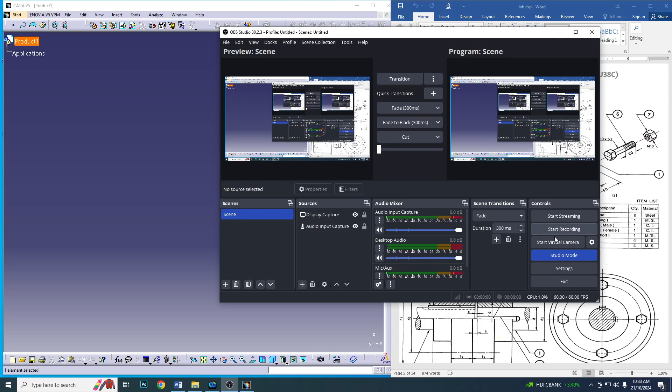Good morning all. Today we are going to see how to do a 3D assembly of the protected type flange coupling. In this coupling we have got the item list or the bill of materials here.

We have got shaft end in two numbers, and we have got a flange male. The part number 3 is the flange male. Here you can see the projection, so this makes it the male part of this coupling.

That is the flange male, and we have got the shaft associated with the flange male here. For the time being, I'm going to call this the male shaft. And then we have got a key, which is a long key, used to assemble or make an interference fit between the flange male part and the shaft male part.

Now next we have the flange female part here. Here you have got a hole, and this makes this the flange female part. And we have got the shaft here, which I'll for the time being call the shaft female, and this is being fixed using a key short, and the dimensions are all given here.

And then we need four nuts and bolts. So we have got M10 by 52 bolt, and in order to complete it we have got M10 nuts, and we need this pair in four numbers in order to give the connection between the flange male and the flange female through the holes provided here.

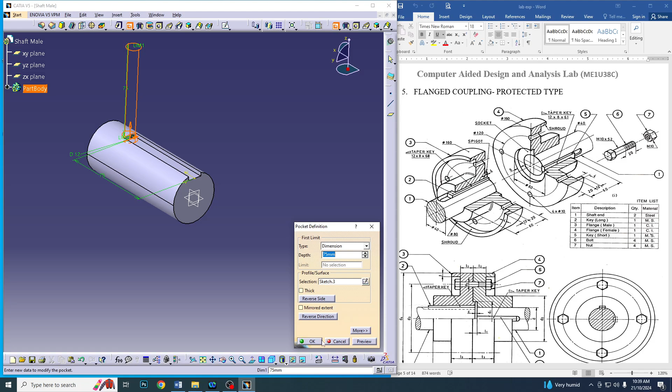Or we'll select this plane to do the cut at that particular angle. So I'm going to draw a circle of diameter 12 millimeter, the center exactly here, and this distance I'm going to give as the length, that is 75 millimeter, and I'm going to pocket it upwards to get that. So this, we have got the shaft male here.

So I'm going to save this as save as, in volume G, I'm going to create a new folder, naming it flanged coupling protected, and I'm saving this shaft male here.

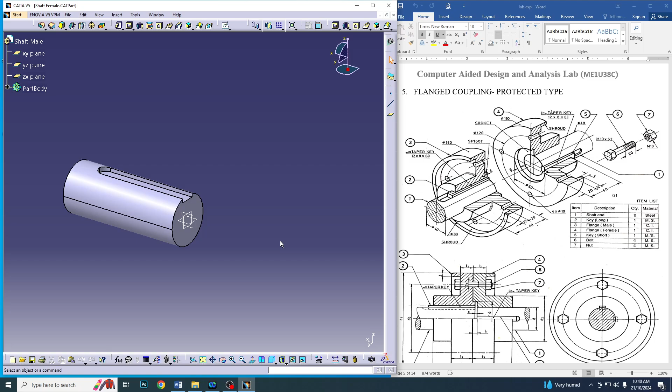Again, for the female, we have got the same dimensions, except for the keyhole, which is a little bit shorter here, but that doesn't matter. We can use the same shaft for the female side also. So I'm going to save it as shaft female. Now I've got two parts here, shaft male and shaft female.

Now the third one, I need to create this flange male. So in order to create this flange male, I'll start again a part drawing, flange male. Now I need to create it, either by drawing the cross section and doing it, or I can draw it using circles.

So I'm going to select this sketch here, and the outer diameter of the circle is 160, going from here to here. So first I'm going to draw this with a diameter of 160. So here I've got the circle, specifying the diameter as 160, and I'm going to pad it for a distance of 20 millimeter. Now I'm going to select this face for sketching.

Here I'm drawing two concentric circles. The first one being the outer diameter, that is 160, and the second one is this small circle. The thickness is 4, so this should be 160 minus 4 minus 4, that is 152. And I'm exiting the workbench, and when I'm padding this, I'll get this particular shroud here. The shroud I'm getting, I need to pad it for a length of 12 millimeter. So the dimension is 12. So I've got this shroud also.

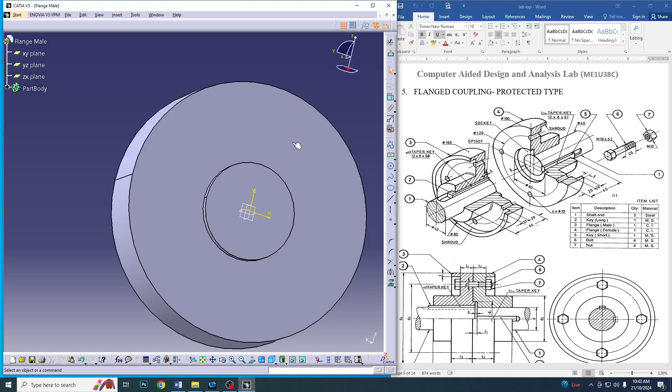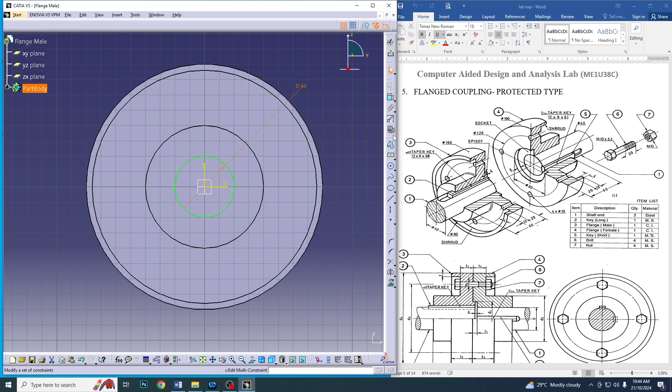Now I need to create the hole, so I can select this plane, or what I'll do is I'll select this face and give sketch. Now I need to create the hole here. This hole, which goes entirely backward, has a diameter of 40 millimeter. So that 40 millimeter hole I can give, and using the same plane I can create these 4 holes also. So that I'm going to create right now.

The diameter is given as, since this is M10, the diameter should be 10, and it is positioned at a distance of 60 millimeter, specified by the circle here with diameter 120. And I need to create another circle, again the same dimensions, diameter 10, and the length is 60, and I can mirror this circle with respect to horizontal to get this one, and I can mirror this circle with respect to the vertical to get this one.

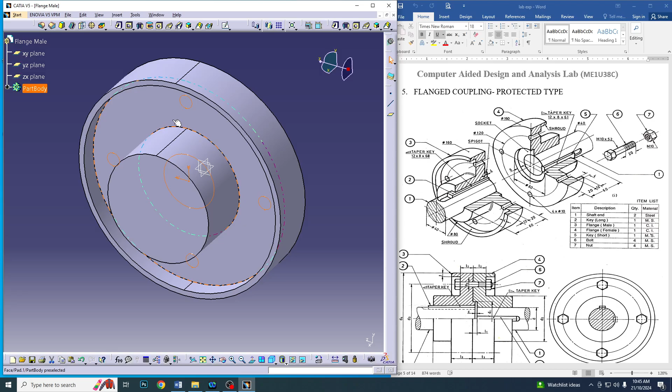Now keep in mind that we have used this surface for sketching, so I need to pocket it. When pocketing, I'll give mirrored extent, and I'll give up to last. I'll give dimension and give mirrored extend, and give a dimension which is very higher than the entire dimension. So the 60 is here.

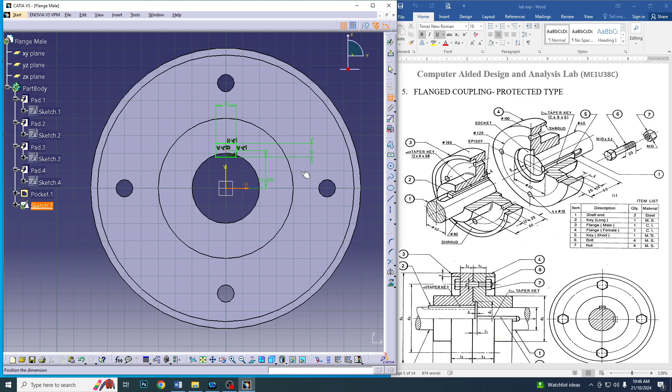So here we have got our flange male, and the things that we need to add now are this keyhole as well as this filleting. So first I'll select this face to create a keyhole. The same method we used for defining the key in the shaft, we will be doing here also. That is, the height will be 8, and the width will be 12, and this point should be at a distance of 20 millimeter to the circumference of the circle. Exiting the workbench, and I can pocket it up to last.

So now I've got my flange male here, and again filleting needs to be done here. So I'll be selecting this edge here and give a fillet. A radius of 5 or 6 mm will do. So here we have got the flange male part here. So I'm going to save as flange male, and the dimensions and most of the geometry are the same for the flange female also, except for this particular hole here. So I'm going to use this figure and edit it in order to create flange female.

So the only difference is that this protrusion is not here, so this 4 mm projection is not here. Instead, there is a hole of similar dimension to a depth of 6 millimeter from this face.

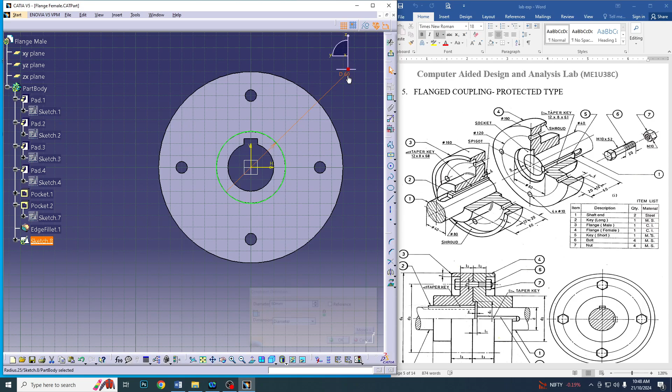So I'm going to select this sketch here, and I'm going to draw a circle to create that hole. The dimension of that hole is diameter 60 millimeter, and I'll create a hole of 60 millimeter over a distance of 6 millimeter from this face.

So here the sketch I have selected is 4 millimeter away from this face, so a total pocket of 10 millimeter needs to be provided.

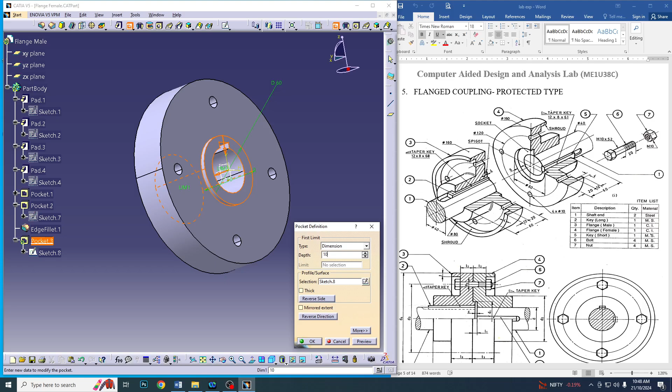And here I have got my shaft or flange female, so I'm going to save it. Flange male and female part have been created. The shafts are created, and now need to create the keys.

So in order to create the keys, again I'll go for mechanical design, part design, and I'll do key long.

Since this is a tapered key, usually the taper angle will be taken on the scale of 1 is to 100. But here, in order to make it easy, I'm going to take a scale of 1 is to 68. So every 68 millimeter, 1 millimeter will come down.

For the key, I'm considering that the dimension 12 by 8 is in the middle portion. When we move a distance of 34 millimeter towards the left, and our scale is 1 is to 68, so 34 millimeter means 0.5 change will come.

So towards the left, a 0.5 decrease will be there in 8 millimeter, that is this height will be 7.5, and towards the right, when we move 34 millimeter, 0.5 millimeter height will come, so here it will be 8.5. That is how we are going to create a key.

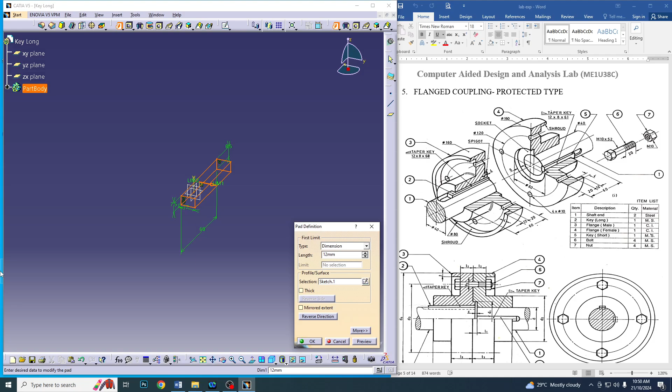So now we have got the taper side as well as the small side here. In order to easily identify, I'm selecting both these faces, and I'm going to the properties where I'm going to change the color so that it's easy for me to identify which face is the taper face and which is the short face when I go for assembly.

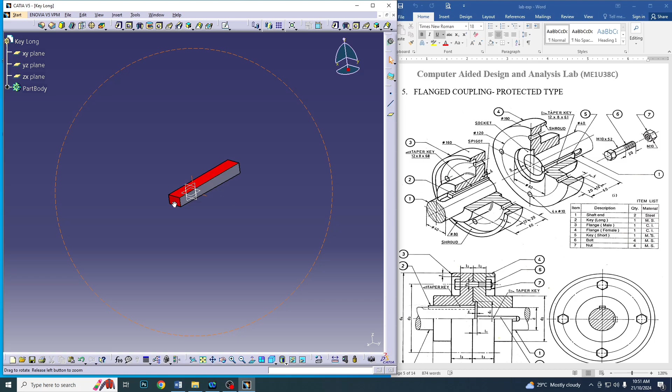So I'm going to save it. So this is key long, and again the same thing, I can edit to create key short.

So I'm going to give the name, change the name to key short here, and I'm going to edit it. I'll go back to the same sketch where I've specified the length. Here the length I'm going to give it as 63.

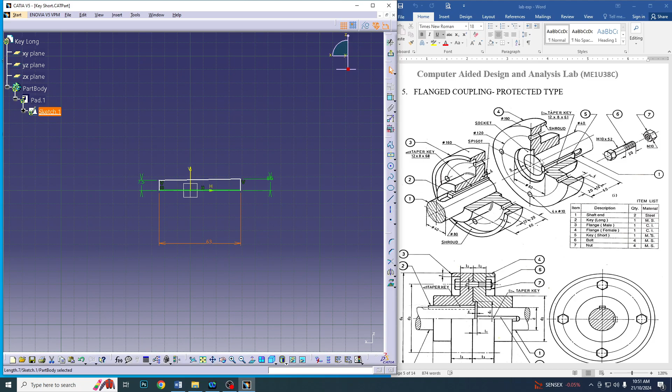So what is the scale that I've considered here? I've considered the scale of 1 is to 63 here. The length is 63, I'm going to change it. Exit workbench, so all the changes are being done here. So key short is also done.

So we have got the entire files ready. Now we need to do the assembly.

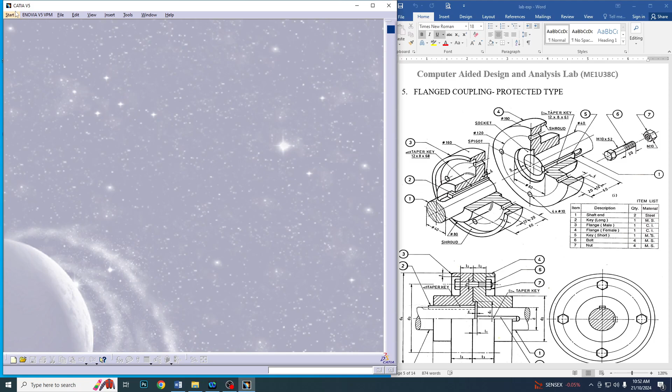The nuts and the bolts, there is no need for us to create it because it is already there in our catalog browser, so that will call from the catalog browser. I'll start mechanical design, assembly design.

So this is the place where I do the assembly. First I'll call the flange male here. In order to call it, click this one existing component, and where I would like to call it, I would like to call it on the product. So I click on the product.

And now we have got the flange coupling protected. So here we're first going to create flange or call flange male. I've got the flange male here, and when we call the first part, the first thing we need to do is fix this part. So I'm going to fix this part here. If you see the constraint, a fix constraint is being defined, and it is being specified by this particular symbol.

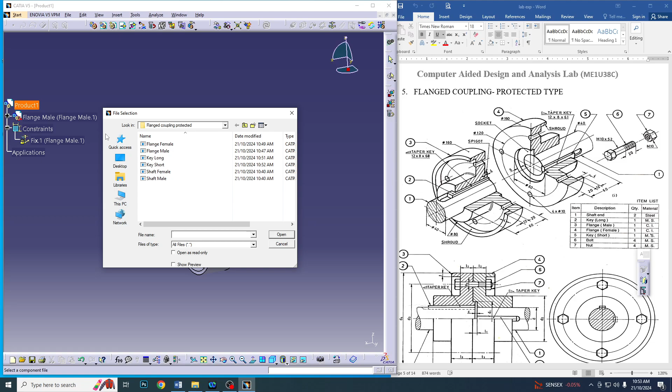And now I need to call the second part again on the product. So I click on the product and I call the shaft male here. So the shaft male is here. I'm going to move it a little bit outside so that I can really give the constraints.

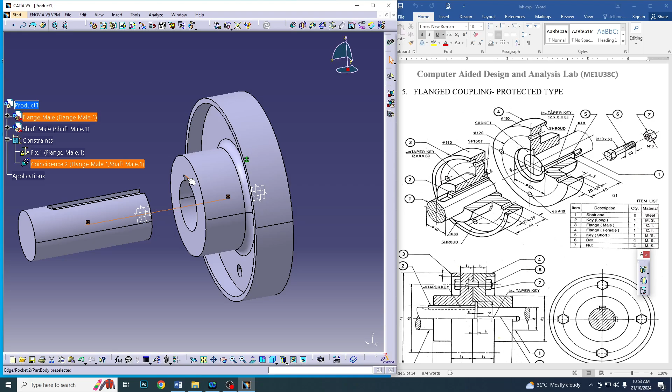So I use the coincident constraint, select this axis to make it coincident. Now this can only move along this direction. In order to align the key holes, I need to make this edge as well as this edge coincident, or on the same line. So I'm going to give this and this coincident - that is my second constraint.

And the final one is I need to make an offset constraint between this face and this face, with an offset of 0 millimeter. So once I update it, I've got the male shaft and the male flange being assembled here.

Now I need to call upon the key, so existing component, again product, and the key long is required here. So the key long is here, I'll just pull it outside for a better view. Here we have got the tapered face, and here we have got the short face. So the short face should come here.

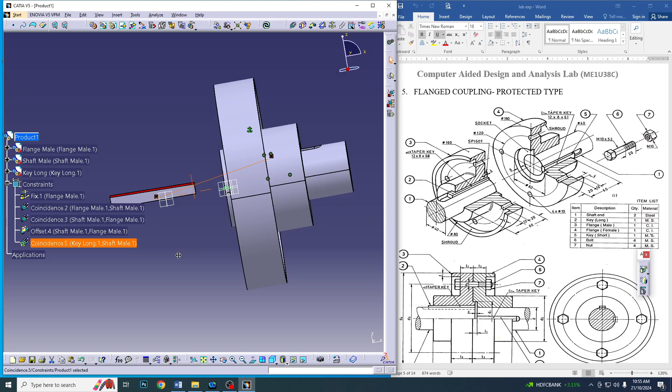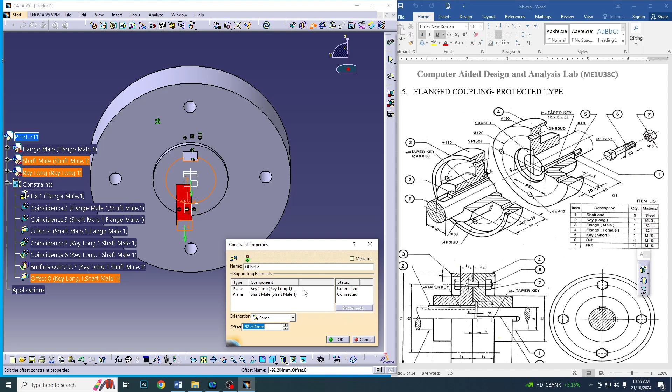I'm going to use the coincident constraint to give coincidence between edges. A tapered edge with the keyhole edges is not possible, so I'll give a coincident constraint between this edge and this edge, and a second coincident constraint between this edge and this edge. I can also give a surface contact constraint between this surface and this surface, and an offset constraint between these faces, with an offset of 0, which will perfectly fit my key into this.

So that is the male part being assembled here. Now I need to do the assembly of the female part. For the time being, if I'm calling the female part also, it will overlap, but we'll see how it can be done.

Click on the existing component, product, now flange female. Since the part numbers are the same for both flanges, even though we've changed the file names, the part number specified when opening the part drawing is the same. We need to rename it, so I'm renaming my new part as flange female. I give OK and OK.

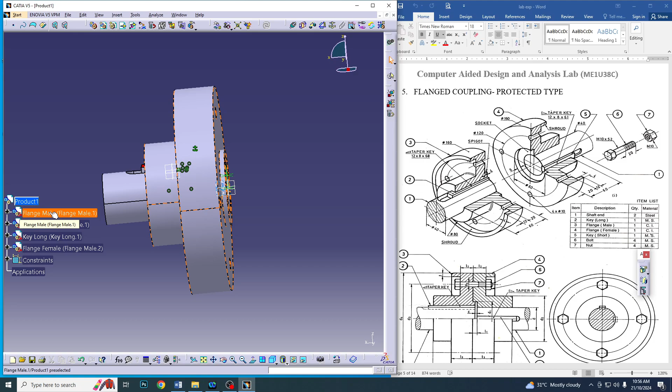So flange female is here, but it is not visible because the flange female and flange male are both on top of each other. Whenever I call this key, this shaft and so on, since we've used the same file for duplicating it, it will be one on top of the other. So for the time being, I'm going to hide the male parts.

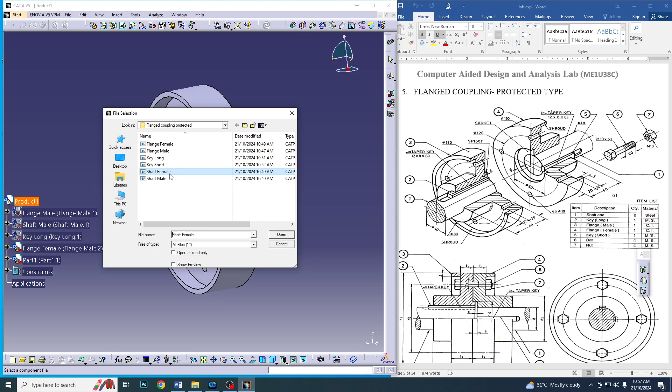Now I got the flange female here, so the female part is here. Now I'm going to call my second part, that is the shaft female. So again I need to rename it as shaft female here. So shaft female.

I'll just move it outside. Now similarly, I need to do all the constraints here the way that I've done it in the previous part. Here the inner face should be selected, that needs to be kept in mind.

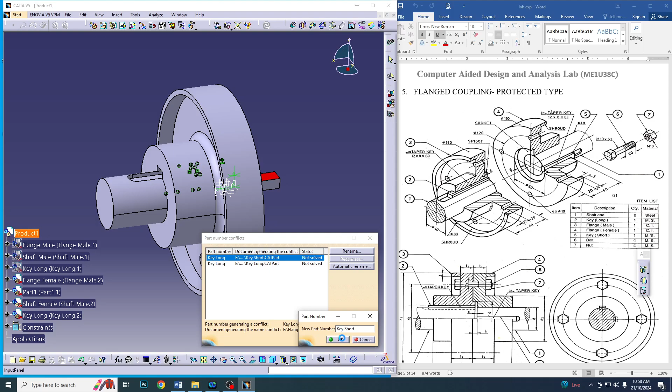And now I need to call the key, so key short. Key short is here, I'm going to move it outside. I need to give the constraints.

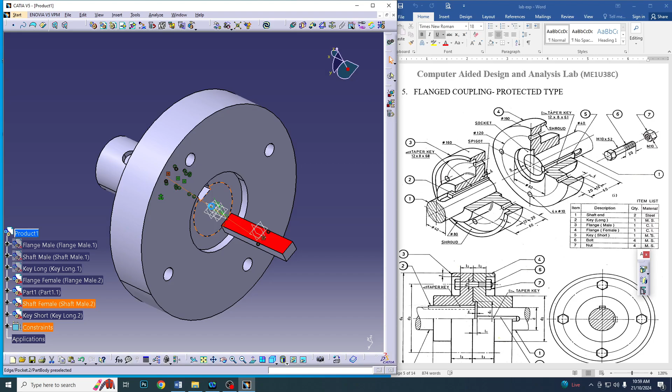So between this and this, again between this edge and this edge, and a contact constraint between this surface and this surface, and finally an offset constraint here to here with an offset of 0. It's updated - it's a perfect fit.

Now I'll just move it, and when moving it I need to rotate it so that it won't be in line with or on top of our shaft male parts when we unhide them. So I'll rotate it and displace it a little bit for ease. But if I rotate it or do any manipulation on this, the constraints will be gone. So I'll check this option with respect to constraint, then rotate it about the Z axis. I've got this rotated here, and I need to drag it along the X axis to move a little bit here. Okay, that's fine.

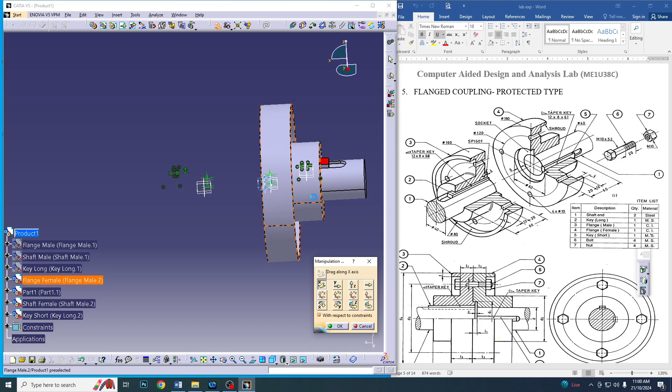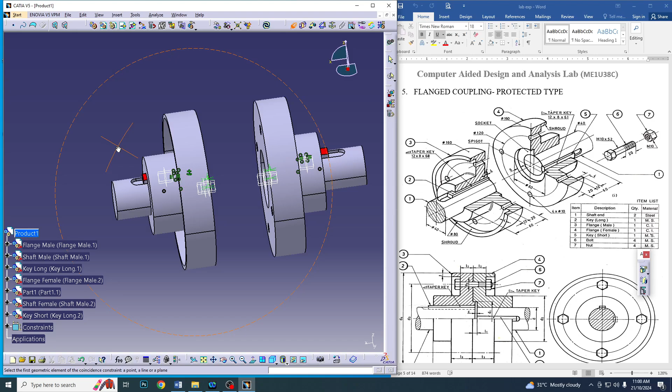And I'm going to unhide my other parts which have been hidden. So we've got the parts here, and now I'll do my final assembly where I'm going to make the constraints between the axis of the shafts. Then the second thing I need to do is coincide the holes, making the holes aligned.

Here you can see this hole corresponding to this particular key is at an angle of 90 degrees with the hole corresponding to the key here. So the keys are aligned at a 90 degree offset. What I'm going to do is give the coincident constraint between this hole and this hole.

Once I update it, you can see the keys are 90 degrees apart. Now finally I need to give the contact constraint between this face and this face, and here we have got it assembled.

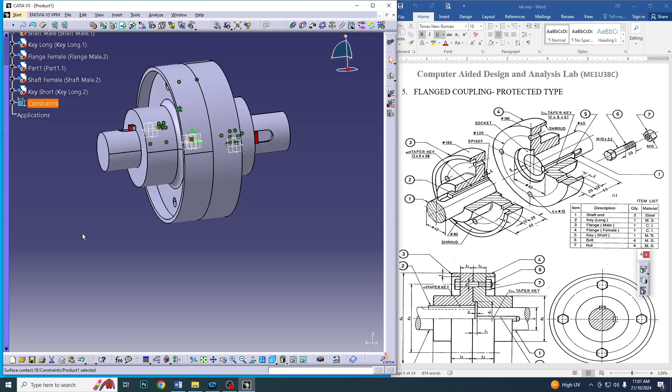Now we need to include the nuts and bolts here. I'll call the nuts and bolts from the catalog browser available here. I'll go to the catalog browser and select the ISO catalog. The ISO catalog is there. Then the bolts, the hexagon head bolt is here. I need to select M10 as specified here.

As you can see, M10 is here, and we have got M10 by 45. Here the length is M10 by 52, so we'll select 55 from here, 4 numbers. We have got 1, 2, 3, 4 bolts here, but the bolts are not visible right now.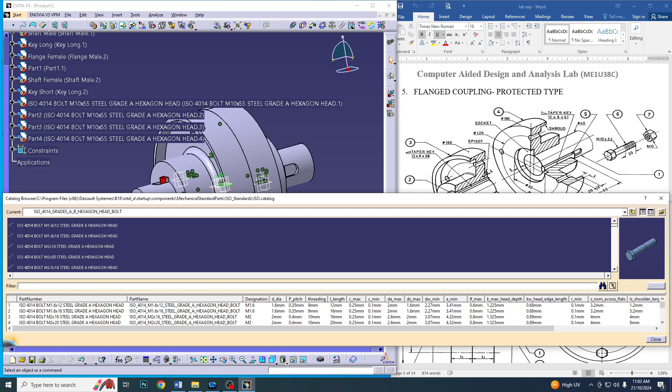So it's somewhere within this. What I'll do is hide all these things. Hide, hide, hide, hide, hide. I have hidden everything. So here I've got the bolts.

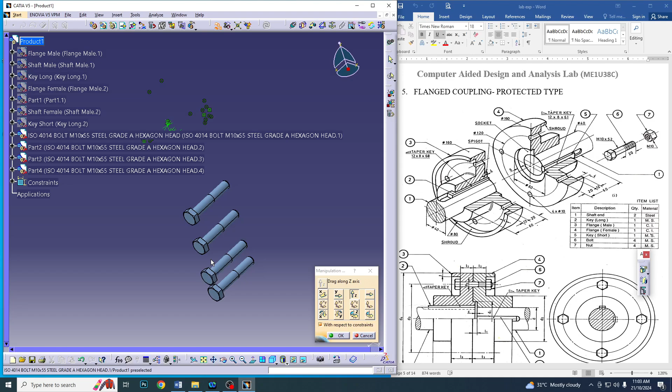So I'll do it along the Z axis. I'll just change 1, 2, 3, 4. I've got it here, all the 4 bolts here. Give OK.

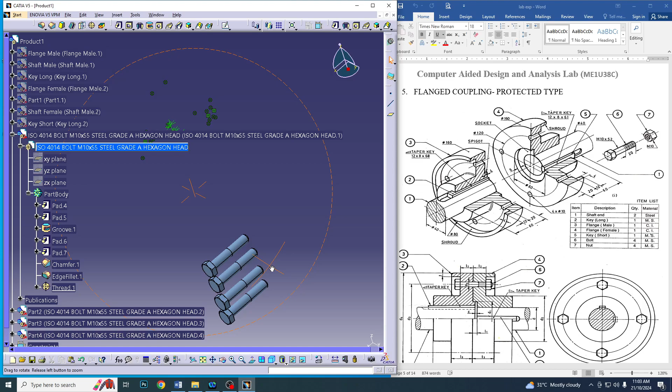And if I want, it is possible for me to edit the length to 52. I'll just show how it is done. I'll check this pad, double click on it, and try to edit the dimension. Click here, and I can make this 52. I give OK so that the change will be done. Now I'm not going to show this or repeat this everywhere. I just need you to know that this is possible.

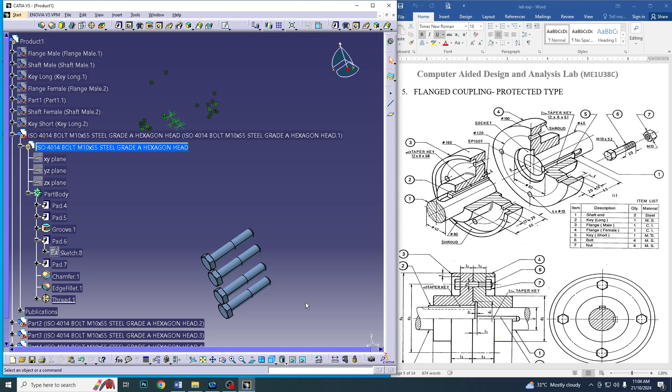But what we'll do is keep it at 55 itself. This is possible, okay. So I've got 4 bolts here. Now I'll call the nuts also.

Right now we are not in the product menu. Here when you see the pad and this option, it's a part menu. So I'll double click on the product. My catalog box is here. So I need to now call upon the nuts. I need the hexagon nut style 1 here, and that is an M10 that I require.

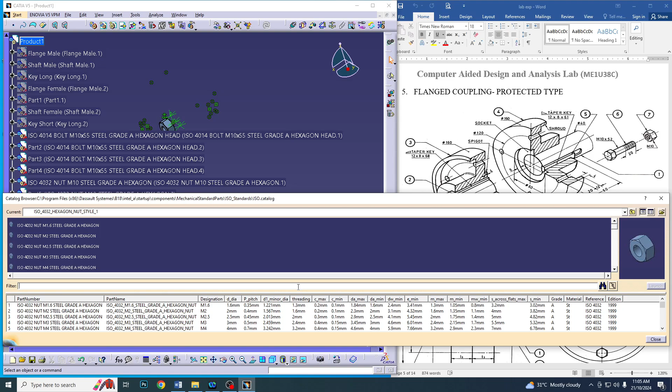So 1, 2, 3, and 4. I've got 1, 2, 3, 4 nuts here. I can move it along the Z axis. Yes. 1, 2, 3, 4. I'll do an X also. 1, 2, 3, 4.

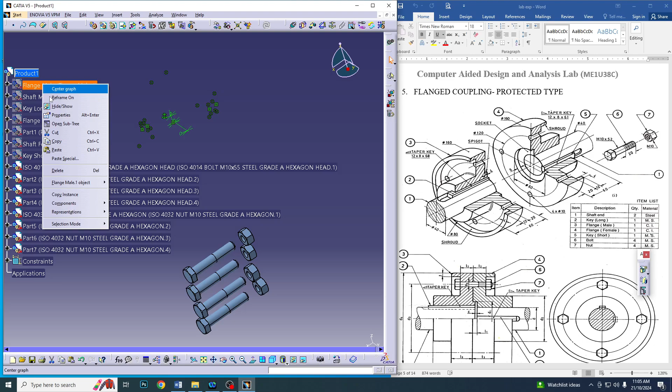Just placing it conveniently. Now I'm going to unhide the parts that were hidden and do my final assembly. Okay, I've got it here. Now I need to do my assembly.

So what I'll do is give the coincident constraint between this and the nut here first. Coincident being given here to here. This one, this one, this one, and this one. The coincident was given, and now I'll coincide it with my 4 holes here.

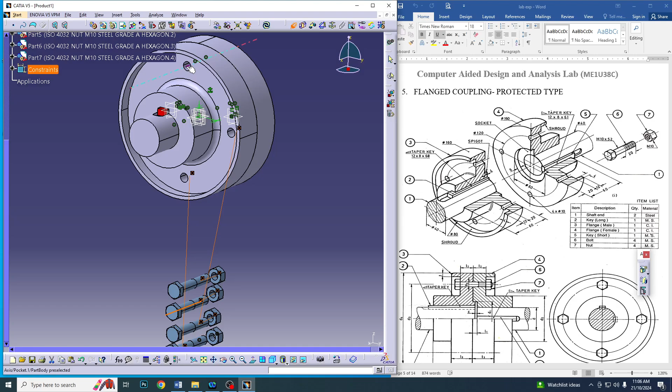First here to here, this to this, to this, and this nut to this nut, and just update it. So I've got it almost there as required. Now what I'll do is take it just outside so that I can give the contact constraint, which is what is required next.

Now contact constraint between this face. I need to select this face. It's actually not that visible. This face to this face, and the second one is this face. Here only the edges are selected. I need to exactly select this face. That's the issue here. So the face is selected, this one.

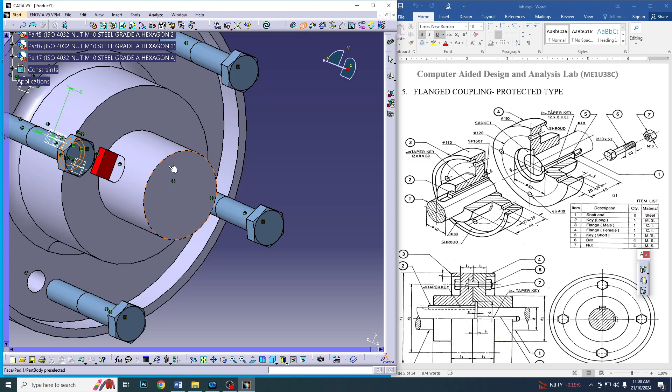And the third one is this face, so this one, and this face, this face, and I give update. So all the bolts are conveniently inserted. Now we need to do the same with the nuts also.

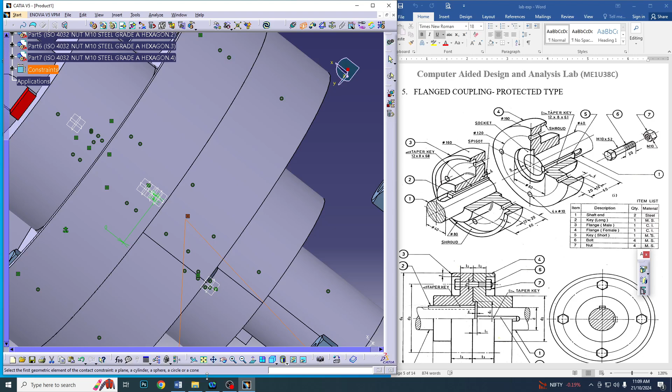Again, contact between this face and this face, contact constraint between this face and this face. So contact constraint between this face, and the final contact constraint between this face and this face. So I give update. That is all inserted properly.

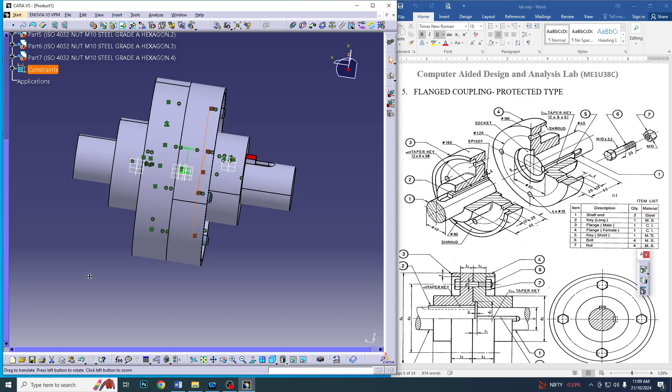So here I've got my flange coupling protected type assembly completed. And if we need to create a drawing out of it, you can go for this particular option here. So here all the isometric view is here. There is the front view, side view, and the top view here.

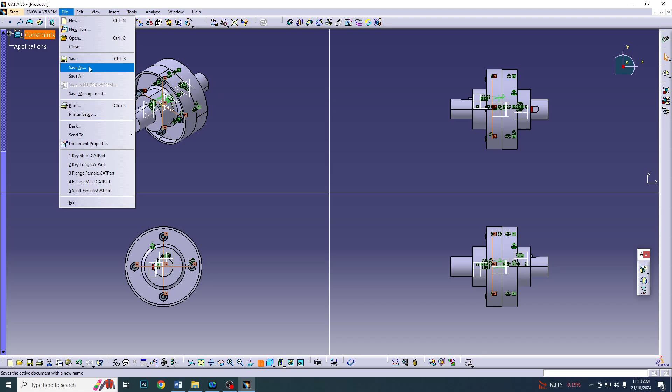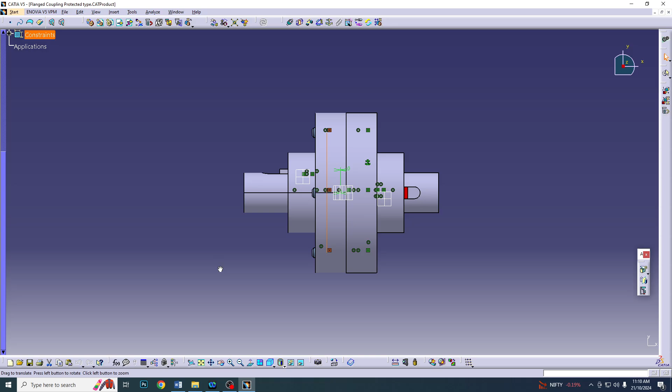Flange coupling protected type. I'm going to save this here. So that's all, thank you.